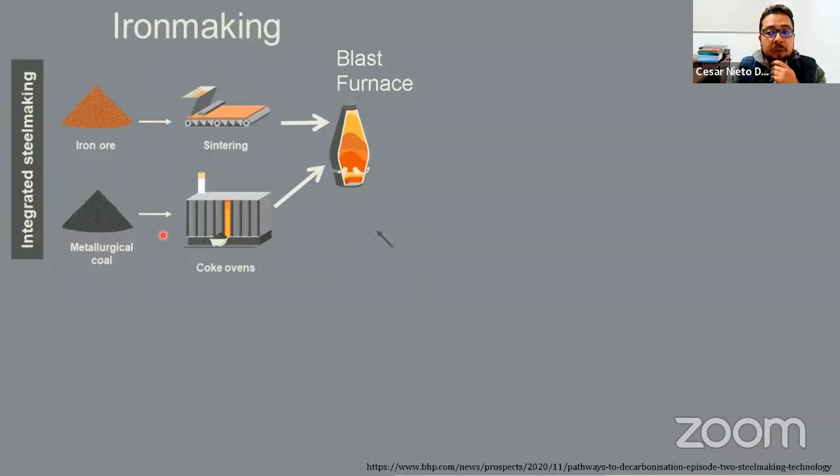Usually, it starts with an iron ore, and this mineral, which is very common, is commonly in powder form and is sintered by heating to produce small pellets. These pellets are melted in a blast furnace, and the main fuel of the blast furnace is coke. I will explain later what coke is. There are two main ways to produce iron. This is the more common one when you are starting from mineral ore. But if you are starting from iron scrap, which is very common too, the furnace that you use is a cupola furnace.

Essentially, the blast furnace and cupola furnace are very similar. Both are a vertical shaft, like a vertical furnace. In the bottom of the furnace, there are some pipes that inject air or oxygen to make the combustion of the coke or any other fuel. And this heat just heats all the components inside this shaft. And that is the way in which the iron gets melted, and you produce some other things.

The main difference between the blast furnace and the cupola furnace is that a blast furnace is a semi-batch production line, and a cupola furnace is a continuous production line. Also, when you are making iron from a blast furnace, most commonly, if you only are making iron, you are going to get pig iron, which is an iron that has a very high carbon, between 3 and 4, a very high silicon, between 1 and 2, and also very high sulfur and phosphorus. It's like a raw iron, right?

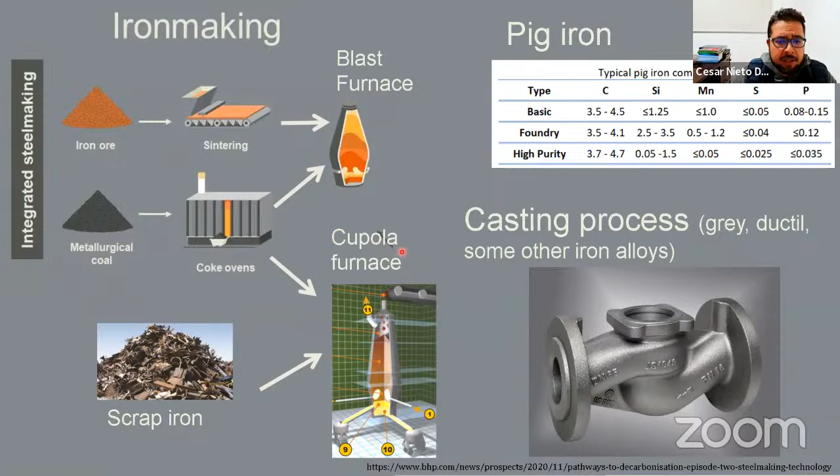And well, if you produce iron, you can follow some other steps, right? You take the pig iron from the blast furnace, and then you start to produce steel by using some other components, some other furnace like a basic oxygen furnace or electric arc furnace, and then you make some casting products, or you make some finished products like iron or steel rolls for construction or some other things.

But anyway, now here in this slide, I am showing you just the numbers about the quantity of iron that is produced worldwide. And here you can see the steel production in tons per year. Around the world, the biggest producer of iron is China, with around 1 billion tons per year of steel, followed by Europe, the rest of Asia. Japan produces a lot of iron too. Mexico also produces some iron together with Canada, and you see it's a very demanded product.

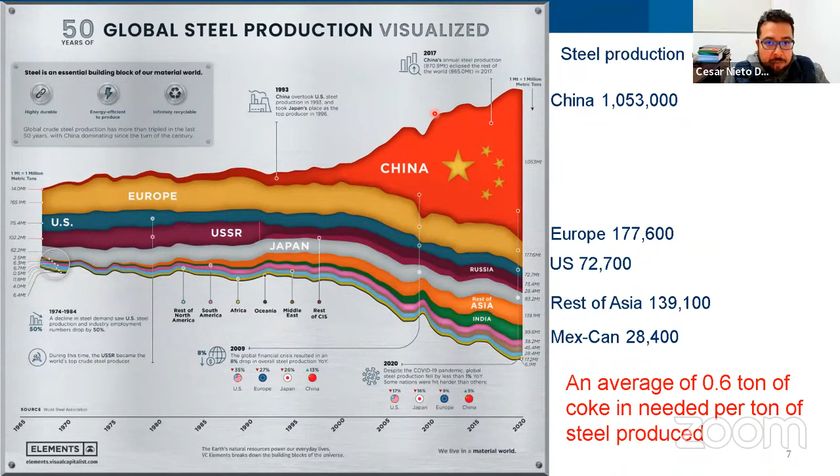Now, on average, to produce 1 ton of steel, it depends on the processing, it depends on the production line, but you need around 0.6 tons of coke. 600 kilograms of coke is needed to produce 1 ton of steel. Now, steel is like a final product, like a refined product. But remember, before making steel, you can produce iron or iron alloys.

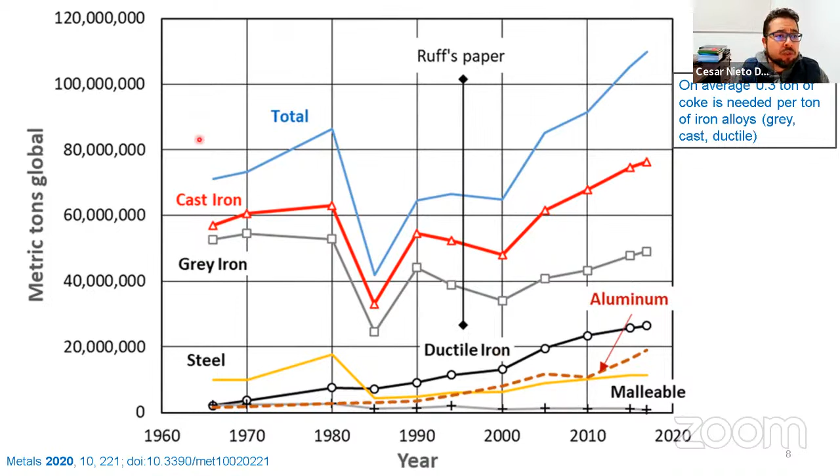In this plot, I am including the global production in metric tons of different iron and steel products. And you can see in this yellow line that the world production of steel is very low in comparison with some other alloys, like gray iron, like cast iron, like ductile iron. In total, the production of iron together with steel is around 110 million tons per year around the world.

Obviously, this changed with the years, and here is the number that on average you need to produce 1 ton of iron. You need around 300 kilos of coke, of fuel, to produce 1 ton of some iron alloys. Now, just making the numbers, and this is a very rough number, it's not very well calculated, it should give all of you an idea of how many tons of coke are needed for iron and steel production around the world. And this is around 40 million metric tons per year.

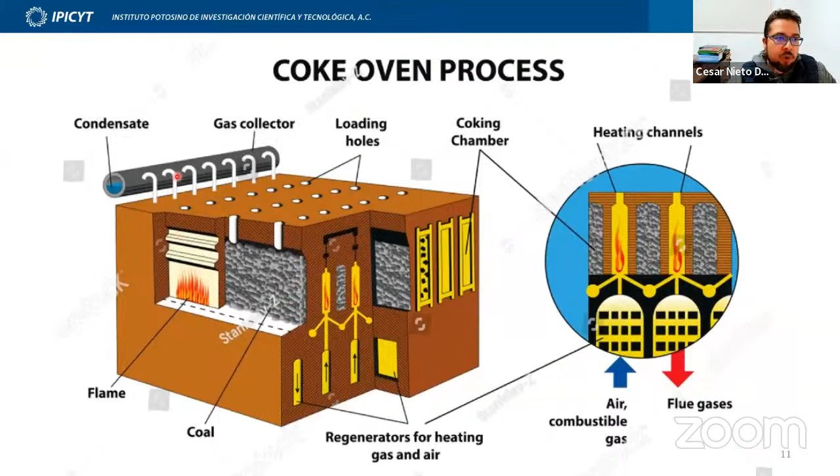Another important feature of the coke oven: here are the loading holes where the carbon is loaded, and here are the flames of the heating source. You have to collect all the gases to avoid environmental pollution.

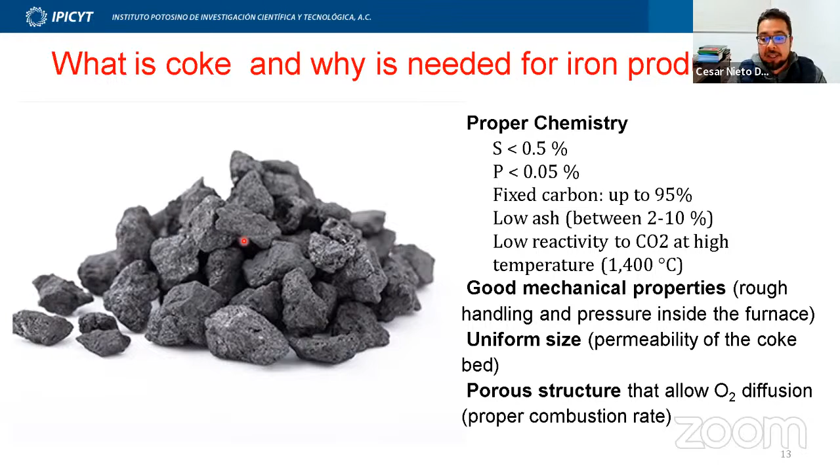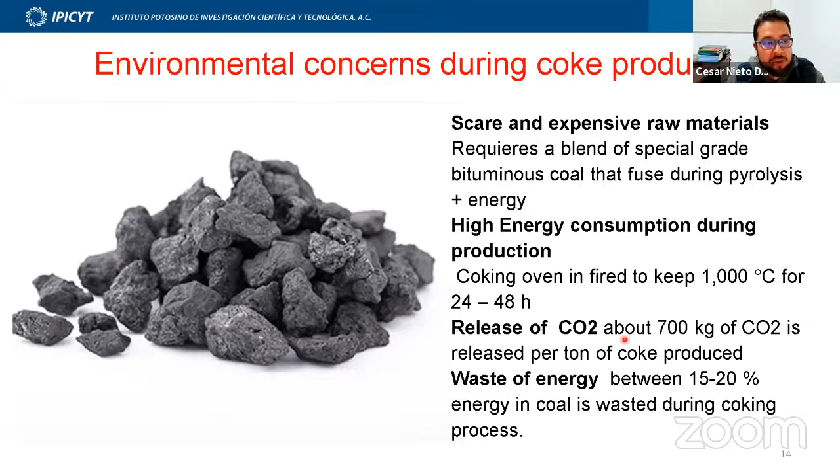Also, it releases a lot of CO2, and this CO2 comes from fossil fuel. Here is just a rough number: around 700 kilograms of CO2 is released per ton of coke produced, which is a very, very large amount of CO2. And also, there is a lot of wasted energy. The bituminous carbon used as raw material to produce coke is essentially pyrolyzed during production, and about between 15 and 20% of the energy that bituminous carbon has is just wasted.

Well, anyway, there are some other drawbacks. And just facing these environmental problems, and looking for alternatives, there has been some research done.

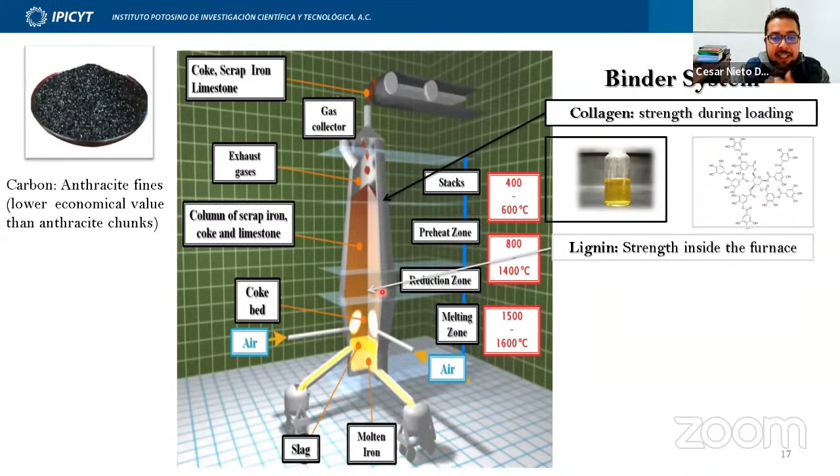We decided to use collagen as the first binder, to provide strength to the briquette before it's loaded into the furnace. The second binder we used was lignin, which provides strength in the preheat zone, or mid-temperature zone. Then we add to the formulation silicon metal, silicon with an oxidation state of 0.

Under the conditions inside the furnace, silicon carbide nanowires are formed, and these silicon carbide nanowires connect all the carbon fraction in the anthracite briquette, allowing the carbon briquette to survive all the way down to the furnace.

A little bit more detail about the binders: collagen is the binder that provides the green strength. Here is a picture of the chemical formulation of collagen. Collagen is a protein that is very common in the food industry. Here are the three main amino acids that form this protein.

We selected collagen because it's a commodity that is very common in the food industry. It is made in very high tons per year. The way in which the collagen provides binding strength to the carbon fines is by a hydrolysis reaction. Water molecules, when you dissolve collagen, interact with these carbon chains. And then when you dry the collagen, these amino acids, these carbon chains, make hydrogen bridges between all the components of the briquettes and make it hard.

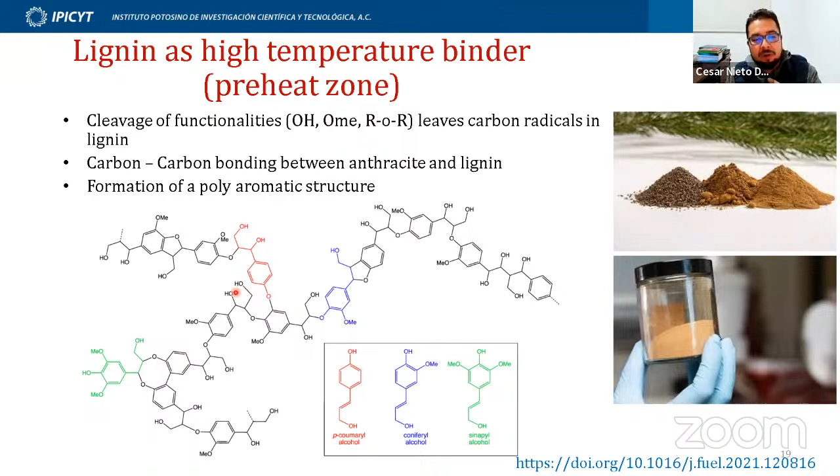Now, about the lignin. Lignin is what I spent most of the time working with when I was at Penn State. Essentially what we demonstrated in this paper, recently published in 2021 in Fuel journal, is that at mid temperatures between 600 and 900 °C under pyrolysis conditions, the lignin becomes a polyaromatic carbon. And this polyaromatic carbon binds together all the anthracite fractions at these temperatures.

But anyway, now I am going to show you a little bit about the lab scale validation that we did to prove the concept of using these three binders to bind the anthracite fines together. We made a mixture of the dry components, which are the anthracite, lignin, and silicon metal, and we bound it together with collagen dissolved in water, and we used this die to produce a brick.

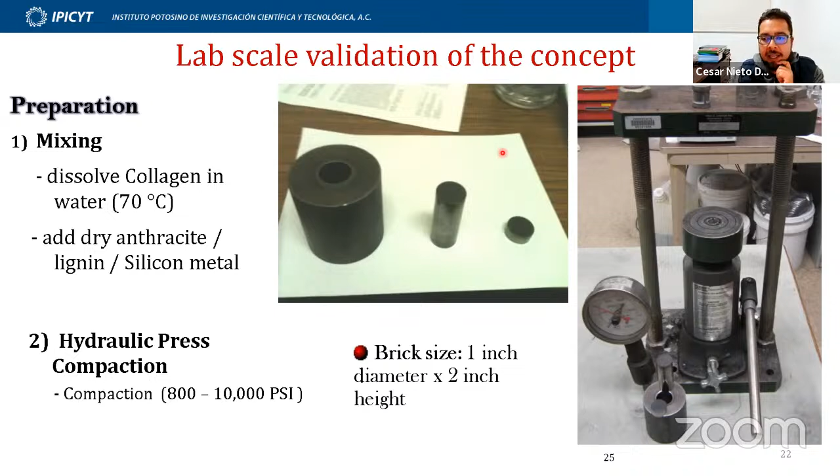We made this brick by putting the mixture inside the die, and then we applied some compaction pressure. We got this 1 inch diameter, 2 inches high, small briquette. Here is a picture of the small briquette. The main characterization that we did to validate this concept is the unconfined compressive strength, using the universal testing machine. We apply pressure with 2 plates, and we record the maximum strength of the briquette.

We did it on raw briquettes that we only made and let dry at room temperature. We also did it after pyrolysis at 900 to mimic the conditions in the preheat zone of the cupola furnace. And then we made a pyrolysis of the briquette at 1400 °C, to mimic the conditions in the reduction zone of the cupola furnace. In that way, we validated that at very high temperature, the briquette will stand together and will have very high strength.

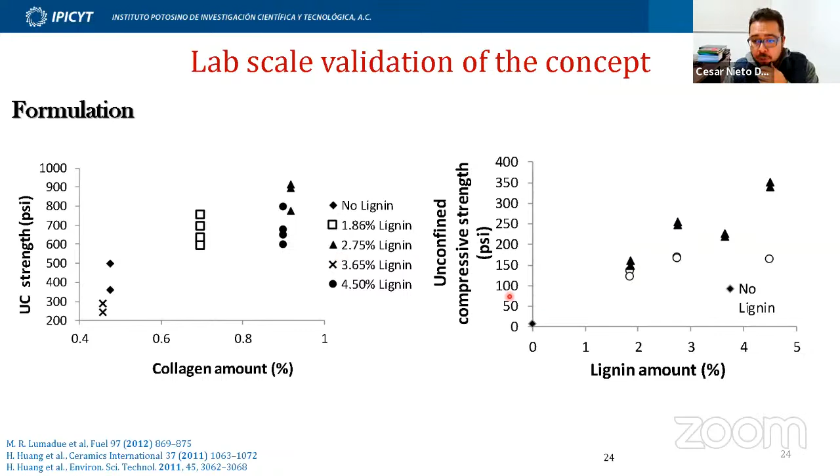First, at lab scale, we validated the concept by exploring the formulation. We saw that when we use a different amount of collagen, the UC strength of the briquette dried at room temperature increases when you increase the amount of collagen. Also, it makes an interaction with the lignin that we are using. We also explored the effect of lignin: if we increase the amount of lignin, we increase the strength of the briquette. And if we increase the amount of silicon metal in the formulation of the briquette, we increase the strength.

Just one number to put it in context: if we prepare a briquette with 5% silicon metal, we can have a briquette that can withstand 1500 kPa, which is a very, very high pressure, and it's coming from the silicon carbides. We also explored some production conditions, for instance, the particle size. If we use very small particle size, we increase the strength. And if we apply more pressure when compacting the briquette, we obtain a more dense briquette with higher strength.

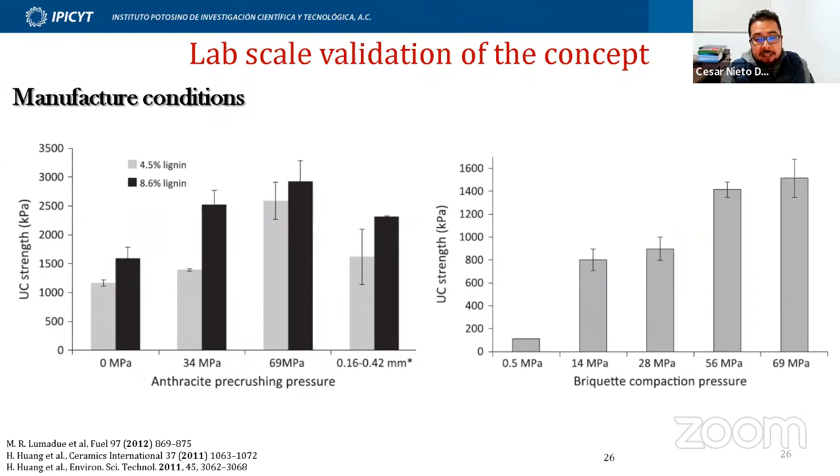Now, after the validation of the formulation, the main problem was that the people in the foundry didn't believe that this was going to withstand all the way down from the top to the bottom of a cupola furnace, because they had tried anthracite briquettes and also anthracite chunks before, and they were very reluctant.

They didn't like anthracite in the furnace. But anyway, Professor Cannon at that time was very persuasive, and he just got funding from, I think, NSF or some other companies, and they said, okay, let me try these briquettes, and if your production just gets wasted, I will pay in full. Anyway, they allowed us to try these briquettes inside a cupola furnaces. And these are the results that I am about to show you.

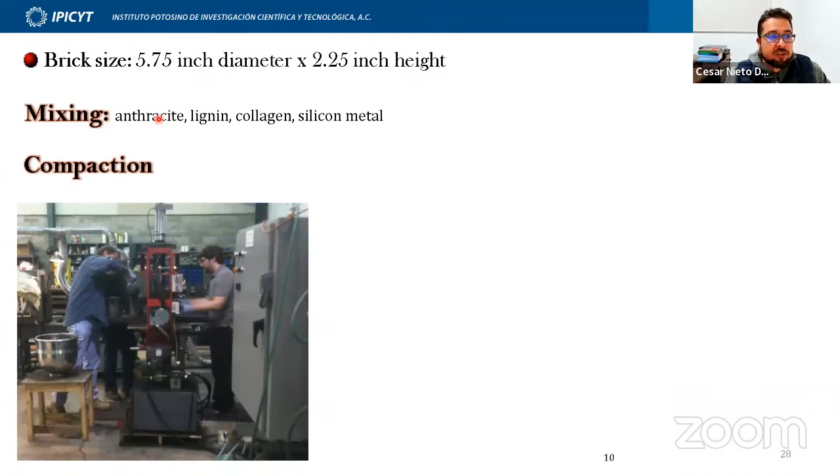Here are just some pictures. We scaled up the production from this 1 inch by 2 inches to this big full-size anthracite brick. This is about 6 by 2 inches in diameter. And the production is very easy. You just mix the anthracite, lignin, and silicon metal. You add collagen in a water solution. You make a compaction. Actually, that's Professor Fred Cannon working.

And then we have a drying conveyor, because you need to dry this very fast to increase the mechanical properties. And that way we produced around 8 tons of anthracite bricks of this size. Every single one of these briquettes was around 2 kilos. And we had enough material to make 2 full-scale demonstrations in Foundry 1 and Foundry number 2, as I am going to call them right now.

And essentially, we didn't make any major adjustment to the operation. We just used the same operation as the regular conditions the foundry people were using. We used a partial 1-to-1 replacement of the coke by the anthracite briquettes. 1 ton of coke was replaced by 1 ton of anthracite briquettes. In Foundry 1, we reached up to a 25% replacement for 3 hours. And in Foundry number 2, we did 25% replacement of coke by anthracite briquettes, and that lasted for 45 minutes.

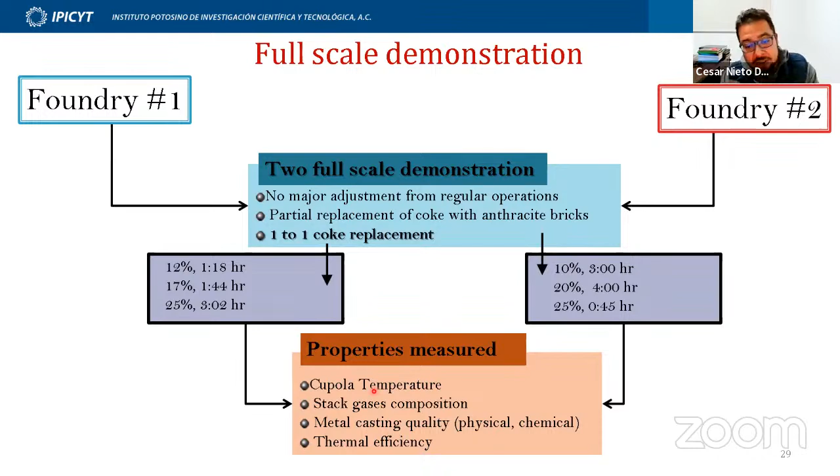And what we measured in that time, we measured a lot of things, but mainly we measured the cupola furnace temperature, which is one of the main concerns when you put anthracite in a cupola furnace. We measured stack gas composition, metal casting quality, and also thermal efficiency. Now, most of this information that I am about to show you is in this paper.

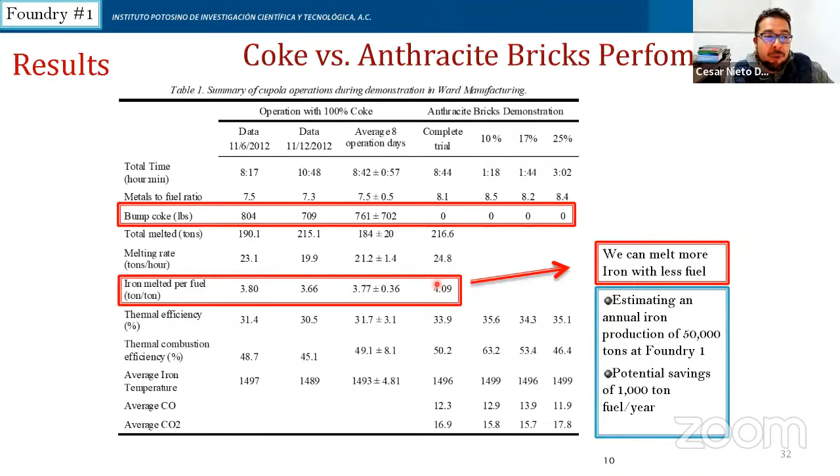Also, the iron melted per fuel was very high when we were using anthracite bricks, which means that we can melt more iron with less fuel. And just to run the numbers, for the production of this foundry number one, the potential savings are around 1,000 tons of fuel per year.

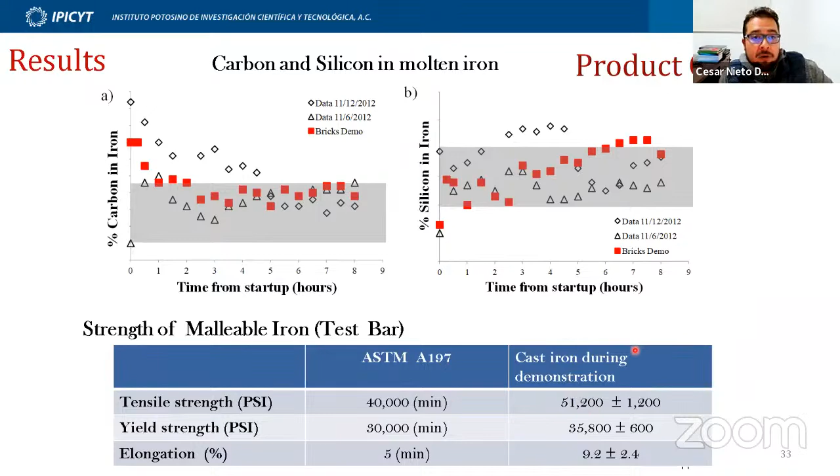Here is just some data about the metal quality. The carbon and the silicon in the iron are shaded in this gray rectangle, and you can see that the red squares, which are the data from the anthracite briquettes demonstration, are very similar to the days when they were using 100% coke. Also, the strength of the iron that was made those days was within the specification according to the producers.

You can see that the thermal efficiency is higher when you were using anthracite bricks, which means that the energy is transferred more efficiently when you are burning anthracite bricks instead of coke. And also the thermal combustion efficiency was significantly higher.

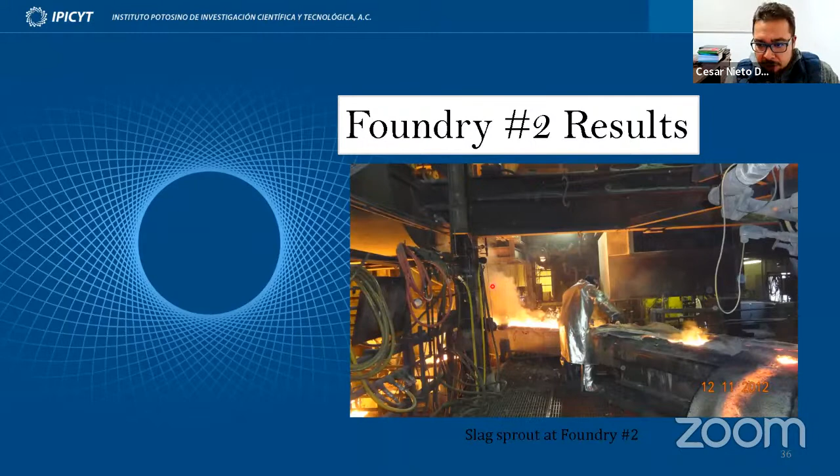And when we started the replacement of the coke with anthracite briquettes, the temperature just went down. We went from 1580 to 1520, which is a lot in foundry. We were very, very sad, and we saw that the temperature was down, and we were like, what happened with this cupola furnace? Why did it work perfectly in the other one, and in this one, which is a different cupola furnace, it didn't work? But anyway, we collected data, and when we analyzed the data, we got the answer.

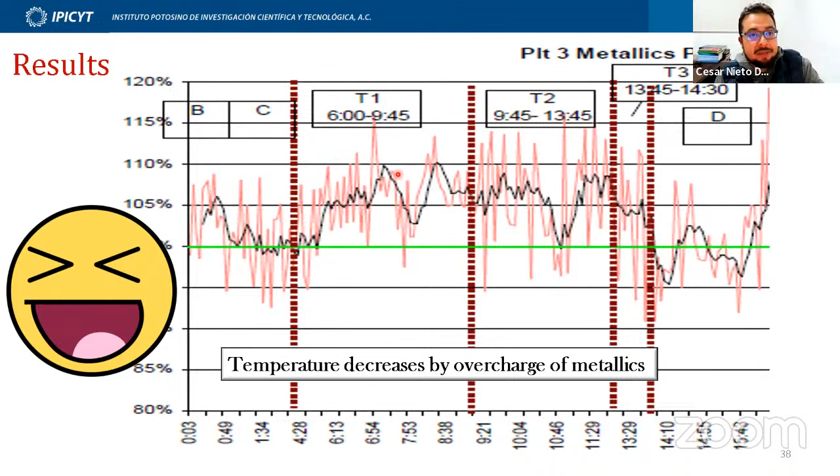But when we started to add the anthracite briquettes, there were some mistakes when they were charging metallics, and they were charging more. And this is why the temperature went down. And that makes us very happy, because it wasn't our problem, it wasn't the briquettes, it was because they were charging more metallics.

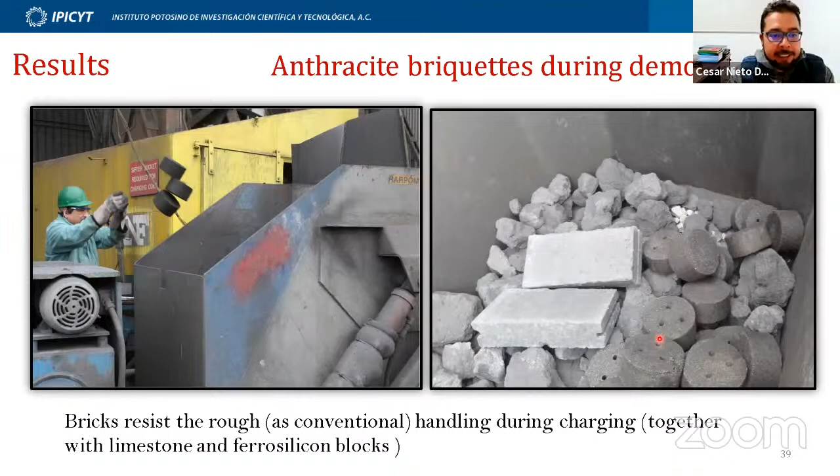Here is a picture of the loading charge car. This is a car that goes all the way to the top of the furnace. And this is just some personnel of the company that were charging these anthracite briquettes. And you can see here is the charging load. Here is the limestone, here are some ferrosilicon blocks, and here are the anthracite briquettes. And you can see that they survive this very rough handling during loading.

Now, the other question that we had when we were in this demonstration is, do they survive all the way down the furnace? Are they really surviving to the bottom of the furnace? And to verify that, the cupola furnace has a tuyere. The tuyere is like a small window where you can see how the iron is dripping, is melting, and also you can see how the coke is making combustion.

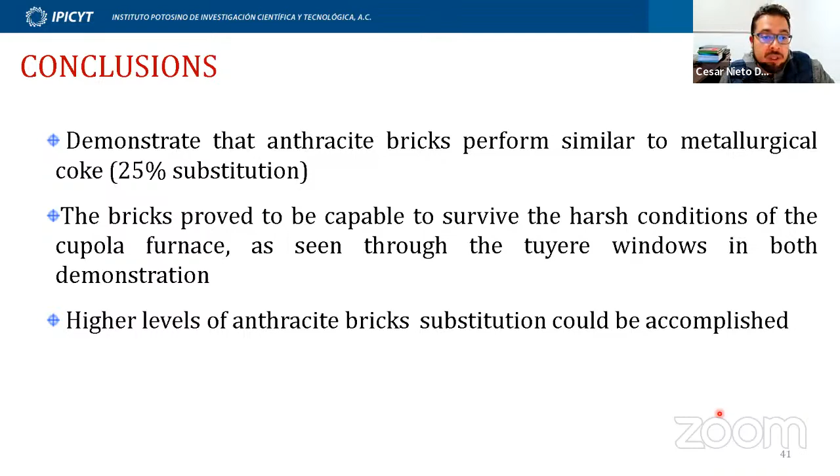Anyway, I'm about to finish. Just a conclusion about this part. We demonstrated that the anthracite briquettes perform similar to metallurgical coke, at least up to a replacement of 25% substitution. Also, the briquettes proved to be capable of surviving the harsh conditions of the cupola furnace, as seen through the tuyere window in both demonstrations. And also higher levels of anthracite briquette substitution could be accomplished. We didn't do that because we ran out of anthracite briquettes. We only made 8 tons. But it was a very successful demonstration.

Anyway, we are making materials, we are making briquettes to do the validation of the raw materials for a company that is about to produce these briquettes for production, for the substitution of coke. This company in Europe produces coke, but they have seen that in the midterm, the production of coke, at least in Europe, is going to be very, very hard.

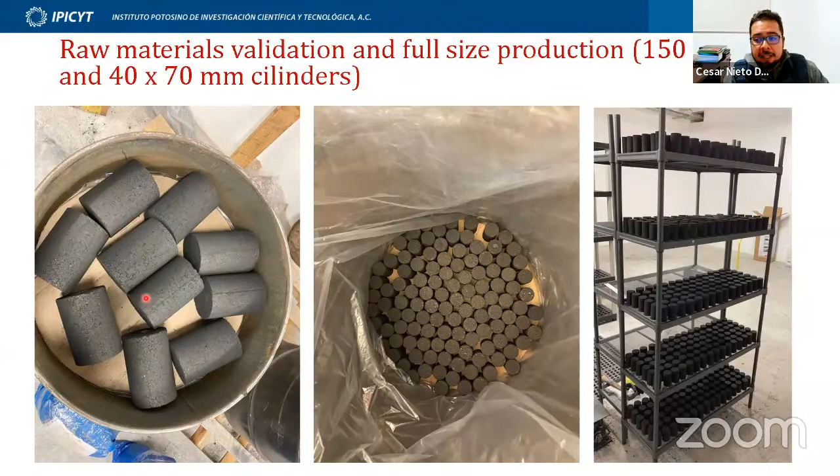The company has in mind to make like 500,000 tons of briquettes per year. And if the drying takes 1-2 days, it is just going to take a lot of time and money.

Also, we are trying to make a reformulation of the briquette to make it cheaper or more convenient. For instance, we explore the quality of different collagen. Also, we look for some other polymer that can react similar to lignin. And also, silicon metal is very expensive, and we are trying to find some cheaper silicon source that can be used to make the silicon carbides.

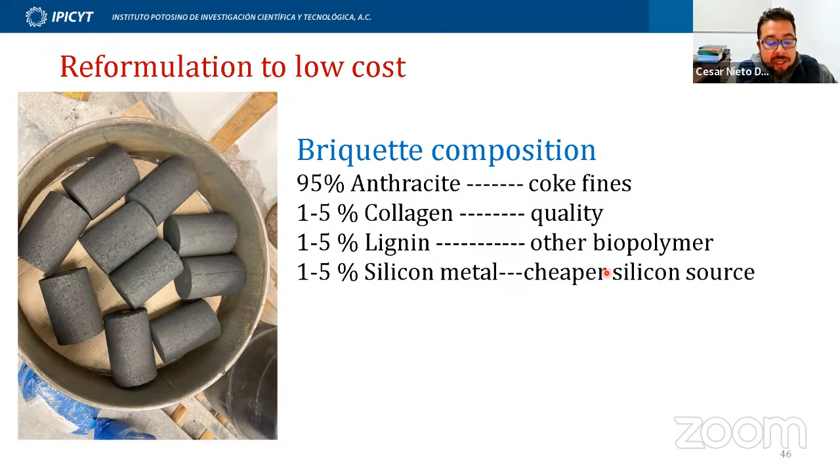Also, the other thing that we are exploring and we are going to start working on this year is, at the end of the day, the carbon source of these briquettes is still coming from fossil fuel. The anthracite is a fossil carbon, and they want to change that. Collagen is bio, lignin is bio, silicon metal we can change to bio, but the anthracite is fossil fuel. We are trying to use biochar to introduce that in the formulation and see what happens.

Always, it's a pleasure. So the title of my presentation, I named it synthetic mineral oxides and hydroxides to grow carbon nanostructures as adsorbents to capture toxic elements and compounds, considering the carbon-based materials topic that is now taking this very nice new journal, Minerals and Mineral Materials.

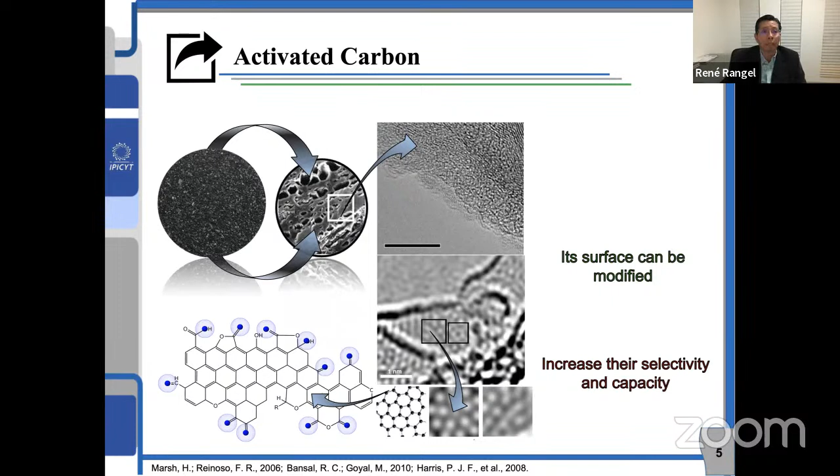These kinds of materials now are part of many materials or equipment these days. You can see that batteries now have graphene oxide. Many electronics have carbon material. So again, this area of carbon materials has been very important.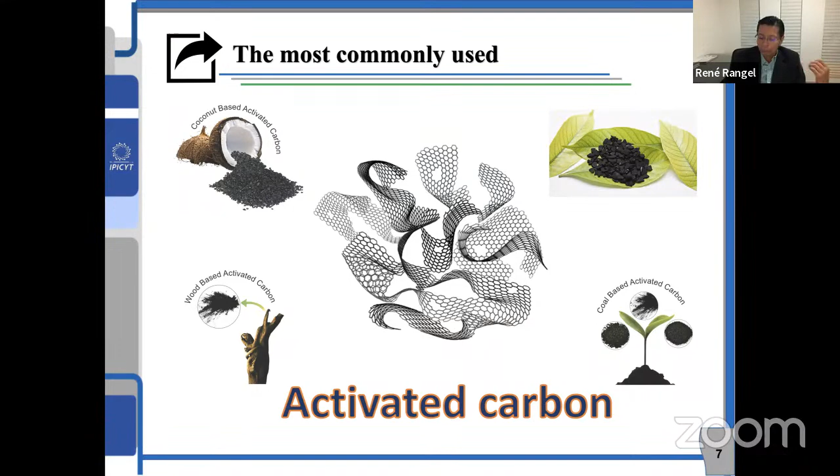In the automotive industry, use is increasing a lot. For example, in China it's used a lot as a heating material. So this, again, activated carbon in a bigger size is still used a lot these days. And as I mentioned, if we move to nanotechnology, carbon nanotubes and graphene oxides have been very important in the development of many equipments and devices.

Now I will talk a little bit about the research I'm doing with my students at IPICYT in Mexico. These are only some examples. We are using carbon materials combined with metal oxides and hydroxides as adsorbent materials to remove metals, to remove hydrocarbons, now working in CO2 capture, and also in the removal of volatile organic compounds. We have also used these materials as redox mediators, combined with biological processes.

Also, we are studying electroabsorption, where we combine materials with electrochemical processes, in collaboration with my colleague Dr. Luis Felipe, who we'll talk about later. We have also studied the interaction of carbon nanomaterials like graphene oxide with different bacteria, which is very important. We are producing different carbon materials for solar cells, like carbon quantum dots, these days from waste, for example. We have also used carbon materials as anti-corrosive coatings to protect valuable metals like gold and silver. So these are examples of the research I'm conducting with my students at IPICYT, and today I will give just a few examples.

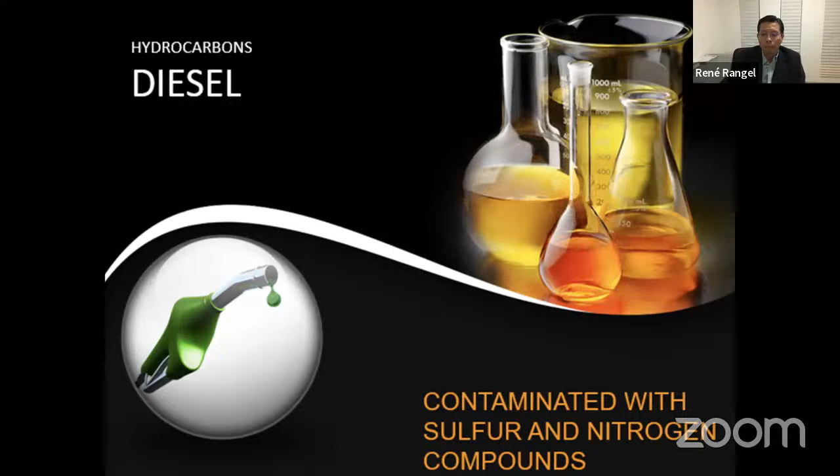The first topic I would like to take is hydrocarbon decontamination. In this case, I will concentrate just a little bit, because we don't have too much time, on diesel contaminated with sulfur and nitrogen compounds.

What's the problem with diesel? During combustion, diesel will produce particulate matter, as well as different gases like NOx and SOx that are very contaminating and pollute the environment. Some of these contaminants will produce acid rain. So we want to use diesel, but as pure as possible.

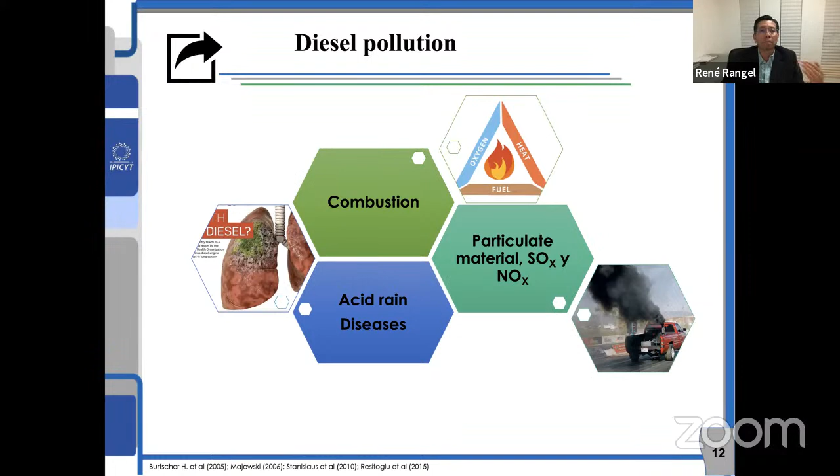The composition of diesel is quite complex. We know that it's made of paraffin, also monoaromatic hydrocarbons, diaromatic hydrocarbons, and of course it has sulfur and nitrogen compounds, which is the main problem.

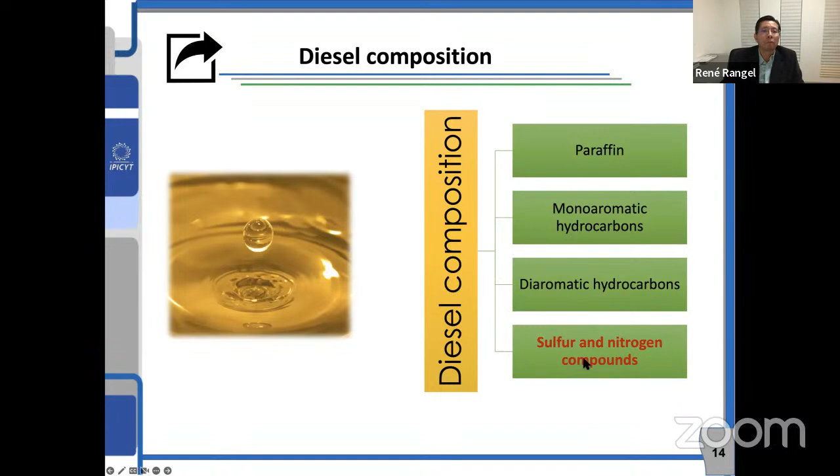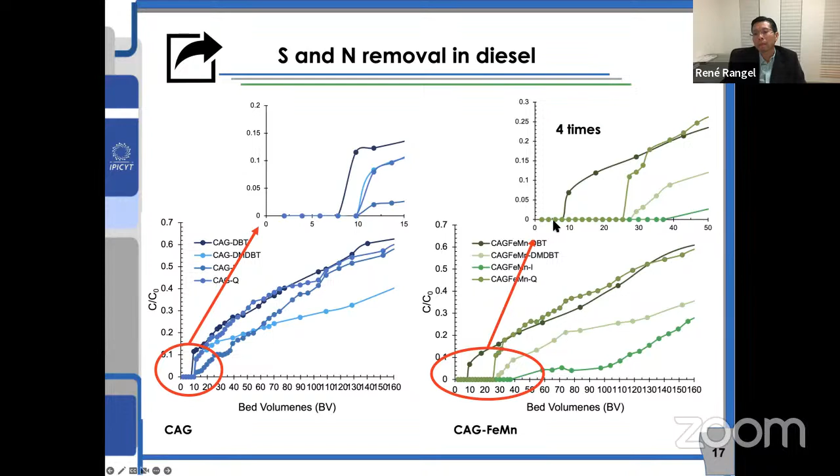In this case, the initial breakthrough was shifted to close to 40 bed volumes, so 4 times more sorption capacity, just by including metal oxides like iron.

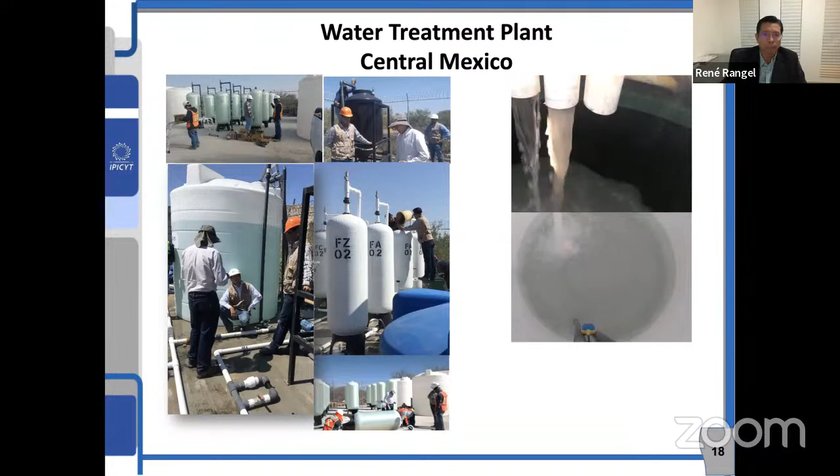So that's important. And this technology, we have even applied at big scale to decontaminate water with hydrocarbons like diesel. We have installed 5 water treatment plants, mainly at international airports, plants that treat 200,000 liters per day.

All these water treatment plants are based on adsorption. These big columns you can fill with modified materials, and these plants are very efficient. We have to work at lab scale, but I always push my students to think in the real application. Let's go and apply it. So it's not easy, but it's possible.

This is one example. I even involve my students in the installation of these plants to get the feeling of how we can solve a real problem. So this is an example about removal of hydrocarbons, and purification of diesel in this case. Now I will shift to the arsenic problem.

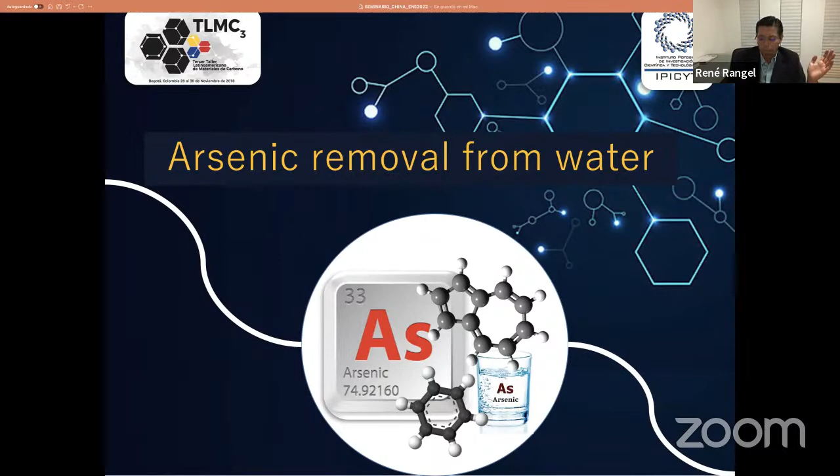We know that we have many kinds of contaminants in water: ions, dyes, pharmaceuticals, microorganisms, hydrocarbons, solvents. All these kinds of contaminants are increasing day by day in the water. And one of the major contaminants we know is arsenic.

Arsenic is present in many countries around the world. Of course we have it in Mexico, and definitely there are problems in China. Nobody wants arsenic - it's a poison, it produces many types of cancer. Thousands of people are still dying per year around the world.

The regulations now establish that we should have no more than 10 parts per billion in drinking water. To reduce the huge concentrations we have in some water sources, which can even reach parts per million, down to 10 parts per billion, is quite a challenge. So we need very good materials with good performance to reach those very low values.

Well, what have we done to face this problem? Some years ago we said, let's synthesize metal oxides and hydroxides as small as possible. We know that if we reduce the particle size, we increase the exposed surface area. A bigger surface area means we expect higher absorption capacity, for example for arsenic. We know, and it has been published many times, that iron oxide is very selective for arsenic 5.

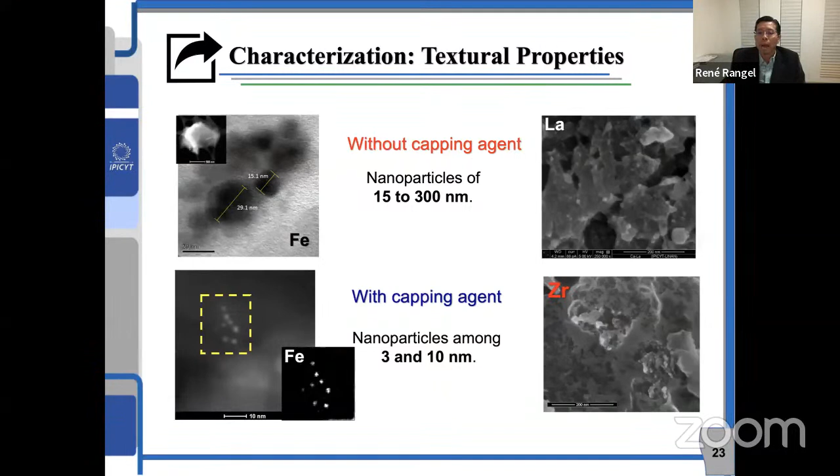So what we have done is anchor these particles on activated carbons. In this case, we managed to anchor particles - iron oxides and lanthanum particles - on activated carbon ranging from 15 to 300 nanometers. But if we use a capping agent, as I will explain in the next slide, we manage to reduce the particle size of these metal oxides quite a lot, to 3 to 10 nanometers, and the dispersion of these particles on the carbon surface is very homogeneous.

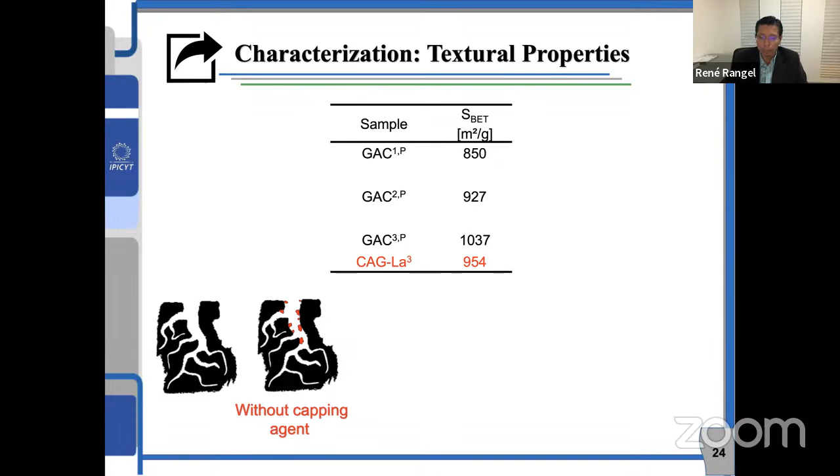One of the challenges is not to block the porosity of the activated carbon. Here, as an example, I show three materials with different surface area. Once we anchor lanthanum, the surface area decreases. But if we use a capping agent, we manage to keep the surface area - even in some cases it increases a little bit, and we get better dispersion.

In this case, the metal oxide is not just impregnated on the surface - it is actually anchored on the surface. This is very important, and this is the mechanism we have published many times. If we don't use a capping agent, the clusters of metal oxide can grow, and we end up with a quite big particle. But if we use a capping agent like phosphorus, for example, we manage to block the growth of the metal oxide.

With a simple rinse with water, we get rid of the capping agent, and we end with very small particles. That's very important for the application. In that case, the arsenic will remain on the material, and the metal oxide will not leach to the treated water. That's very important.

In this case, the metal oxide will anchor on the oxygen-containing groups of the carbon material. So we can anchor different metal oxides. In this case, you can see them in red dots.

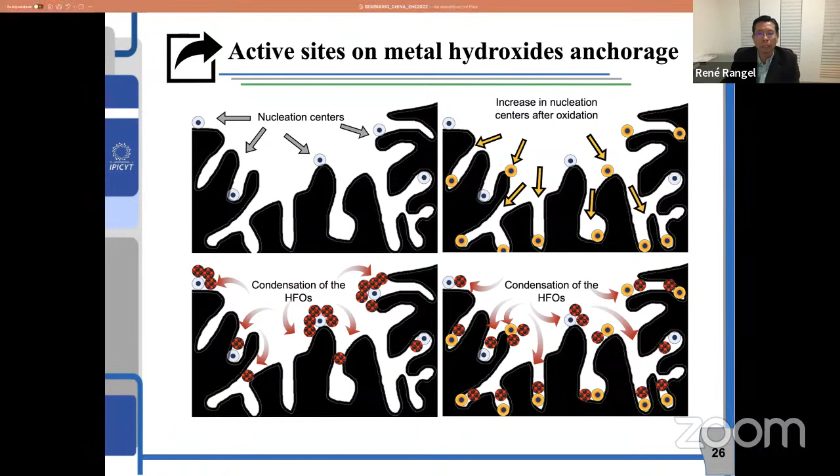One of our ideas was to increase the concentration of metal oxide, aiming for a higher sorption capacity of arsenic. So we said, what if we oxidize the material? We will increase the amount of nucleation centers, in other words increase the concentration of oxygen-containing groups, giving us a higher concentration of metal oxides, and with that, a higher sorption capacity. That was the idea, the thesis of one of my students.

Shown here schematically: if we have a material with a lot of metal oxide but also negative charge, we will have repulsion of arsenic 5. But if we have a positive charge along with metal oxides, the absorption capacity will increase. So the message here is we need a balance, and this is very important.

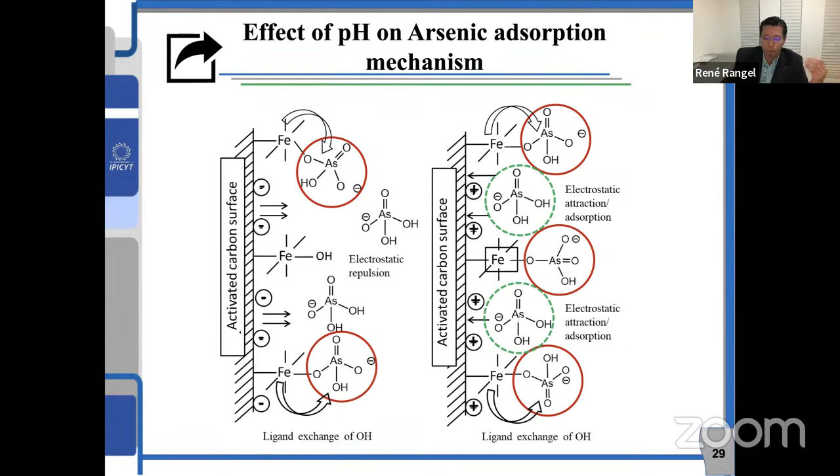That's what we learned from arsenic removal. Apart from using metal oxides like iron and lanthanum, in the last year we have anchored mixes of metal oxides like combinations of iron and manganese, iron and cerium, zirconium and cerium, and obtained a very good material. We just published the results—a material with a very high capacity of more than 180 milligrams per gram, which is quite a lot—and we applied for the patent, so we are very happy about that.

Another advantage of using mixes of metal oxides is that they are more stable, so they will not leach as easily. We also get very amorphous materials with higher surface area, which gives us much higher removal of arsenic.

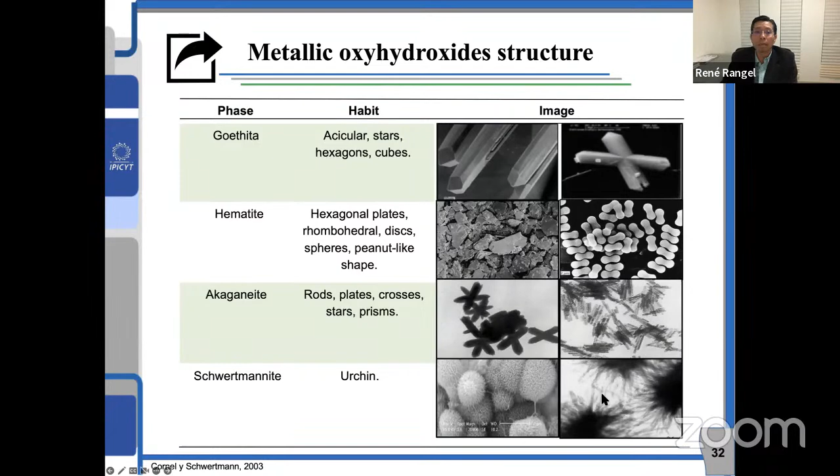Applying these mixes of metals, we have obtained different shapes of metal oxides—this kind of stars, peanut-like shapes, plates and prisms, and also urchin. Recently, when we mix iron with manganese, we obtain interconnected fibrils with also very high absorption capacity. These materials are quite small and very amorphous, giving very high surface area and interesting absorption capacity.

We have published these results as well.

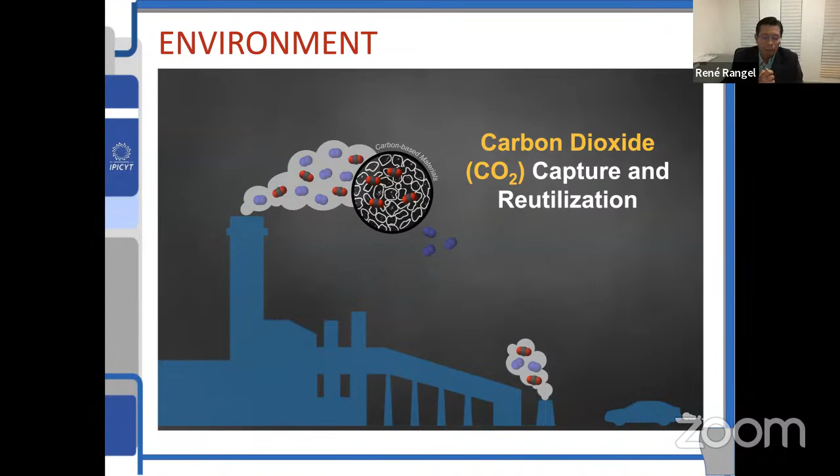Now I want to move to the carbon dioxide topic, which is very interesting these days. We know that environmental pollution is important, and we know that the concentration of greenhouse gases is increasing a lot. Of course, this has changed the climate, and this is leading to global warming.

We also know that carbon dioxide contributes 66% of this effect, so it's very important to target this contaminant. Of course, around the world, governments have many agreements to reduce CO2 contamination as much as possible.

What is the reason? We know this causes global warming, but if we look at the concentration of this contaminant, going back to 1750, the concentration in air was 278 parts per million. The report from 2021 showed 416—that increased a lot. But if we continue like that, by 2050 the concentration of CO2 will be 550. This will change everything, and it's already changing everything—everywhere, in Mexico, in China, everywhere, the weather has changed a lot.

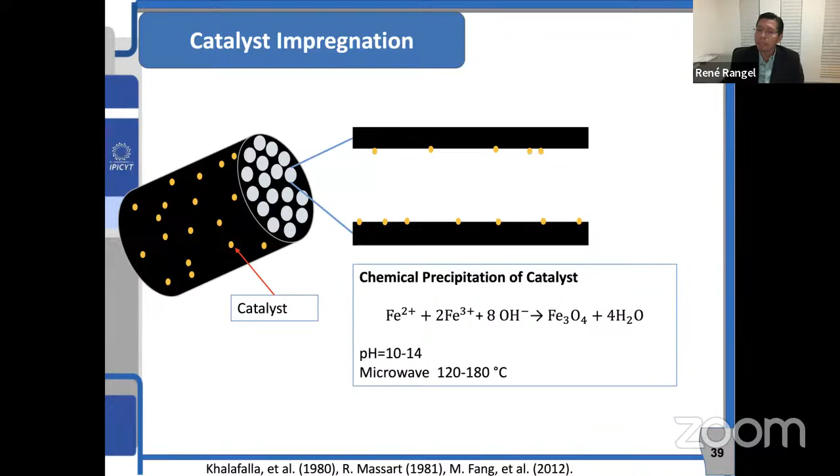Once we have the catalyst, we apply a chemical vapor deposition. This is the basic methodology. And in this case, we are using acetylene as a carbon source, okay? And we synthesize these nanostructures in just a few minutes; in 2 to 10 minutes the material is ready. Of course, we need to control the concentration and the temperature. As you see, we are using between 500 and 800 to finally grow these carbon nanostructures as homogeneously as possible.

So once we have that, we have a micrograph: after a few minutes, we synthesize these carbon nanotubes. These are already anchored, also very important, on this very nice biochar, this very nice fiber. As you can see here in the tips, the catalyst ends up on the tip, okay?

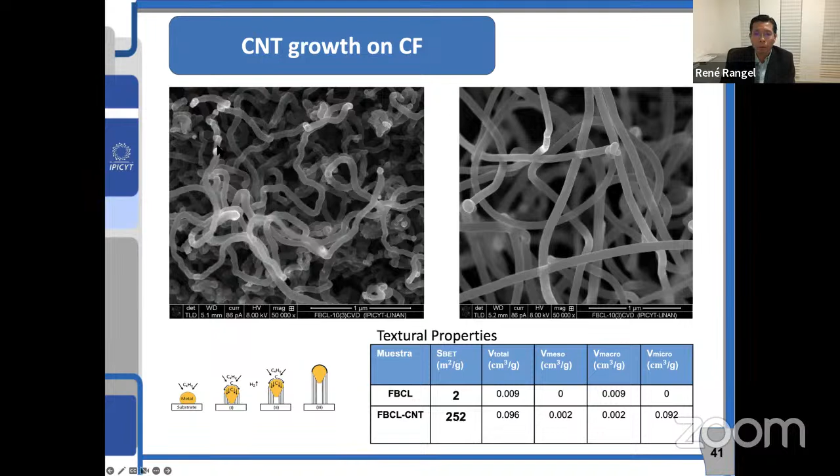And here, something very important is that the aim is to drastically increase the surface area. So as you can see here, the natural fiber, the carbonized fiber, has a very low surface, close to 2 square meters per gram. But once we grow carbon nanotubes, the surface increases up to 250 square meters per gram. This is very important because all this area is already exposed to adsorb CO2, okay?

Some materials, of course, can have very high surface area, but these materials are microporous or mesoporous, so we will have some diffusional problems. In this case, no, because these carbon nanotubes are inside these big pores of the fiber, so kinetics are very fast.

Okay, here are some results. This is at atmospheric pressure and 25 Celsius degrees. If we compare the black line with the blue line, the blue line is the material that has the carbon nanotubes. We already increased the adsorption capacity from about 1.1 to 1.6 millimoles per gram, which is very good, and this is related to surface area.

Kinetics is very fast, as you can see, very fast, because some materials can take hours and hours to reach equilibrium. In this case, in a few minutes, you saturate the material.

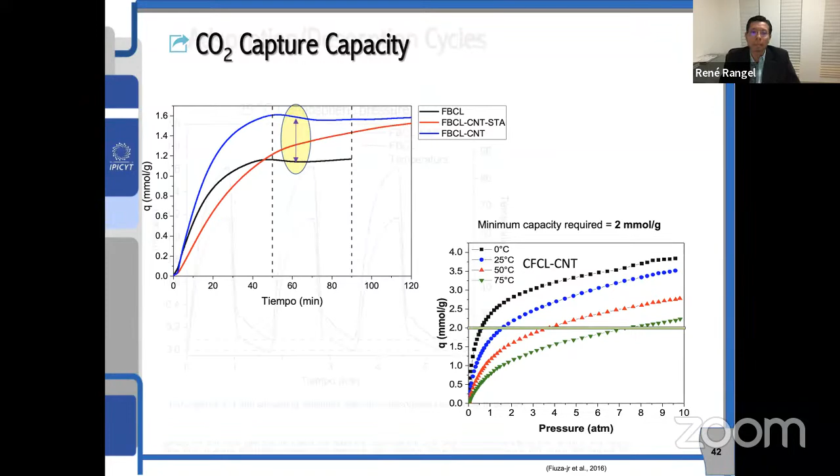Another question is, okay, is the material regenerable? Because otherwise it's not a good material. Well, in this case, at atmospheric pressure and 25 degrees, we have the cycles of adsorption and desorption. And as you can see, again, the kinetics are very fast. When it goes up, it's adsorption and then desorption. Adsorption, desorption. And so the regeneration capacity of the fibers is 99%.

And the material with carbon nanotubes is 95%. But this is at 25 degrees. If we increase the temperature a little bit, the regeneration is 100%. So this is also very good because we can reuse the material n times. That's very important.

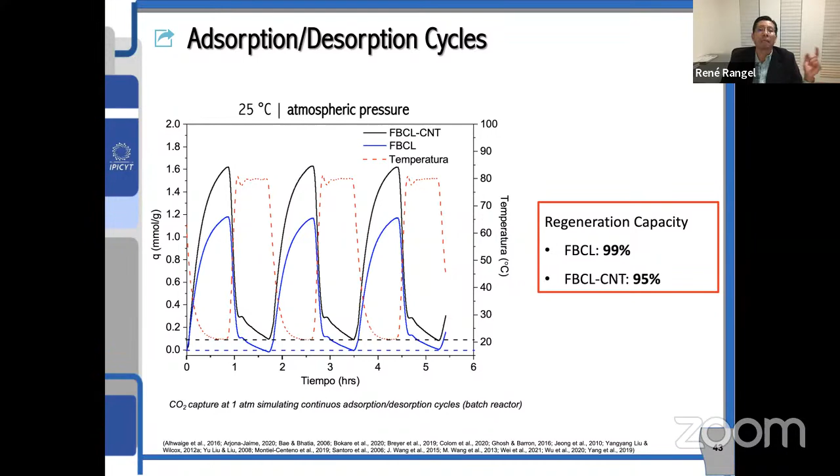Okay, now one of the questions is how CO2 can be adsorbed on carbon materials. Well, in this case, the mechanism is quite complex, but of course, as in this scheme I show you, CO2 will interact with the oxygen-containing groups, because we need to remember that CO2 has a quadrupole moment, and so it can interact by electrostatic interactions. Also remember that the graphitic layers in these kinds of materials have delocalized electrons, and so this sp2 hybridization can also interact with this molecule.

Also, we will have the edge sites on the graphene layer that are rich in electrons and negative charge, and these will also interact with the CO2 molecule. Okay, and of course, we can also have this kind of interaction between neighboring CO2 molecules, like in this case. So this is very important. This is when we have a graphitic layer.

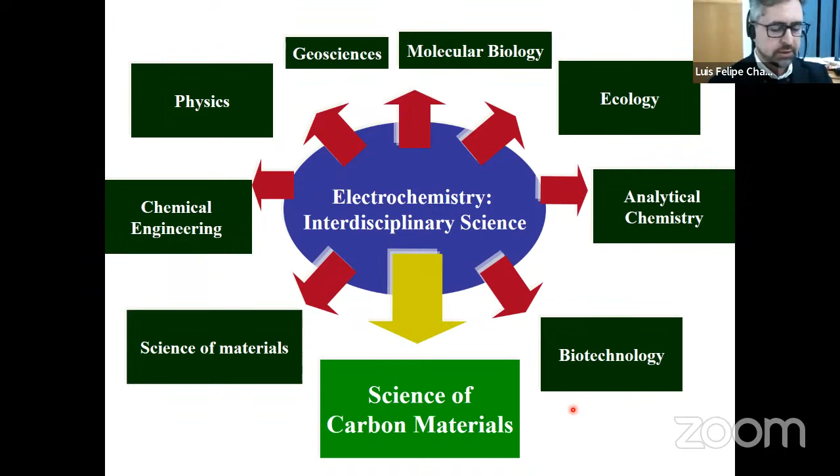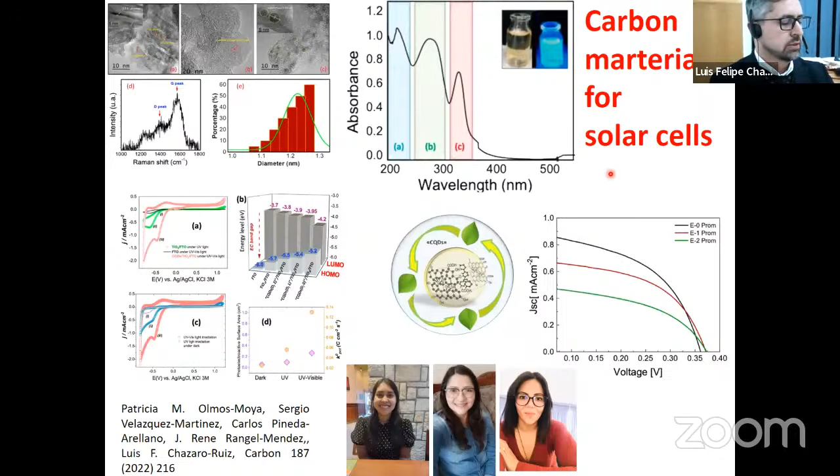Part of the things that we do are bioelectrochemical systems, and for those we use carbon materials as electrodes, especially to develop electroactive biofilms in systems like microbial electrolysis cells or microbial fuel cells. René already mentioned that we work in the development of carbon materials, especially for sensitized solar cells. Also, we have worked on electrochemical sensors with carbon materials. In this slide, you can see that we develop elements of molecular recognition that we immobilized on carbon materials like graphite or glassy carbon or carbon-based electrodes.

These other two examples were also mentioned by René, but additionally, we work with bioelectric systems in collaboration with the biotechnologists, in which we stimulate the living microorganisms with an electric field. So then we change the metabolism to produce things that are useful, like hydrogen, or for remediation of soils or water. In the case of electrosorption, we also apply this to the removal of organic compounds, like those from the pharmaceutical industry or from the textile industry.

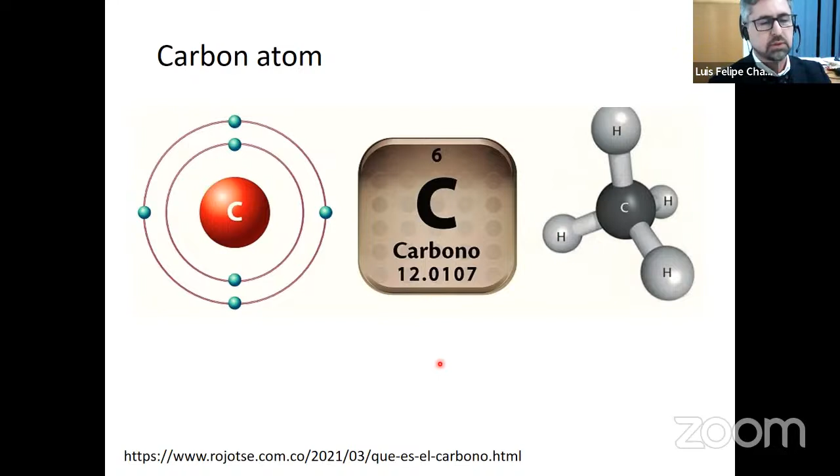And all these systems or topics have in common that we use carbon materials. As René mentioned, one of the main advantages of these materials is their electrical conductivity. But another advantage is that the morphology and the chemical properties on the surface can be modified in order to modulate the material for the application we are interested in, like supercapacitors, batteries, electrochemical sensors, photodetectors, or in the last years, conductive textiles.

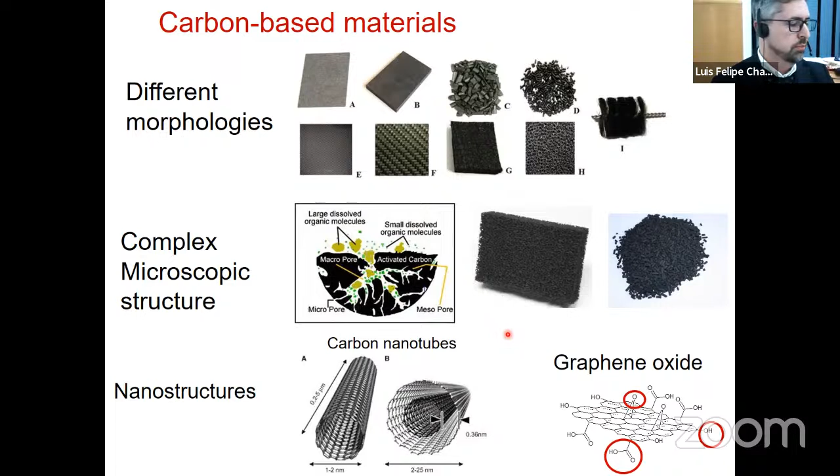So it depends on what we would like to do. Then we need to choose the morphology. So this is the important thing. But in this presentation, I'm going to focus on the importance of the correlation between the electrochemical properties and the textural and chemical properties of the carbon material. And then I'm going to start with the first example, the electroadsorption of arsenate.

And in this case, one of the important things is that in the state of San Luis Potosí, two of the main economic activities are the mining industry and the manufacturing industry. So these are the main sources of pollution in air, soil, and water. But this state is located in part of the semi-arid region of the country. It means that one of the main sources of water is groundwater.

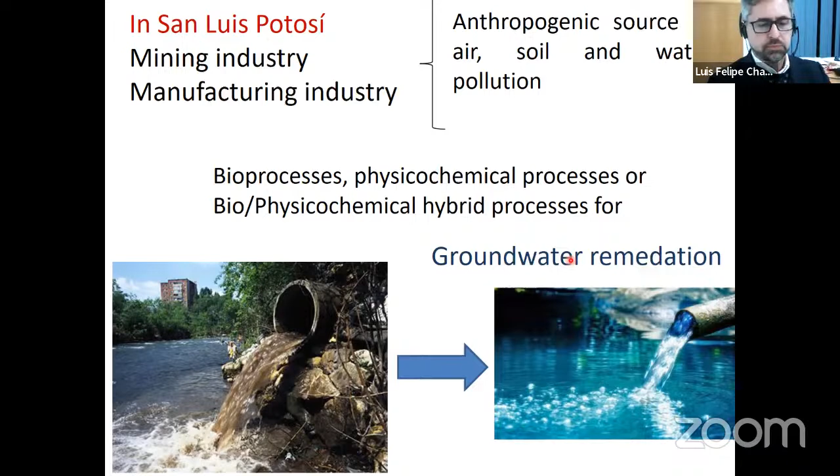And the groundwater contains arsenic, usually together with fluoride, in addition to these other elements. This couple is commonly found together, in different concentrations, but they usually are together. This is because the minerals which contain arsenic are in contact with the groundwater. And usually the concentrations are above the maximum allowable limit, which is 10 parts per billion.

So this is a very serious health problem in this state, and also in the neighboring states, especially in the north of the country, which are all located in the Chihuahuan desert, which means that people usually consume groundwater. And the problem is that this water, although it is good for human consumption, contains higher concentrations of arsenic and fluoride.

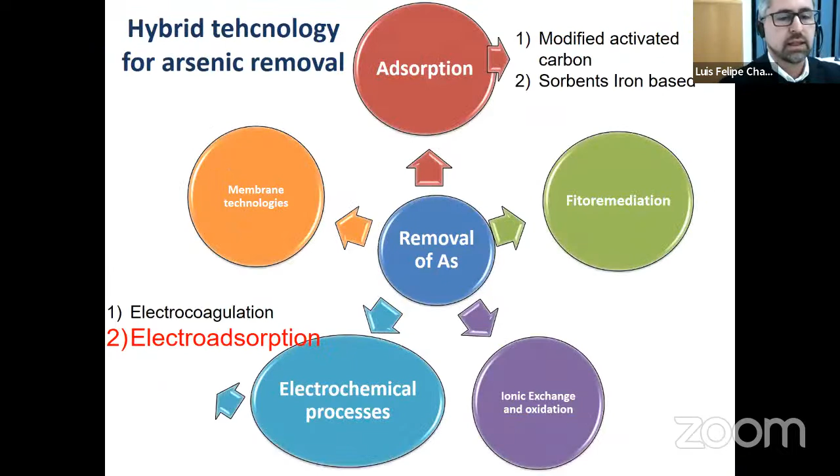And as mentioned by Professor Rangel in the previous talk, arsenic is an environmental problem. So we have been working in the study of electroadsorption, but the question is, in which part of the treatment train would adsorption be applicable? So when adsorption decreases the concentration of arsenic, like here, but the concentration is still slightly above the maximum allowable limit, the adsorption can no longer contribute to the removal. So then is the moment to apply the electroadsorption.

And the electroadsorption can remove organic and inorganic ions from the water. The electroadsorption consists in polarizing conductive adsorbents, such as activated carbon, and these materials provide high surface area to promote the migration of the ions to the electrode surface with the opposite surface charge. And the process is like the capacitive deionization process for desalination of water. This is an example.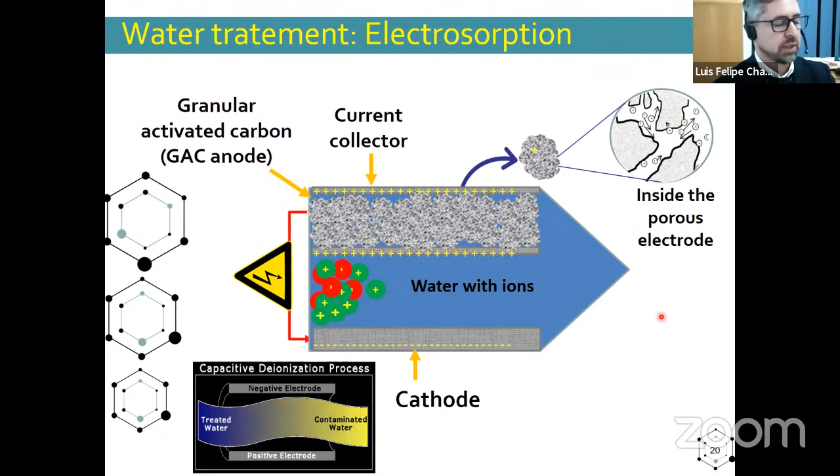Here, for example, this is an asymmetric cell where you can see the anode, and this is the cathode. This electrode is made with activated carbon, a granular activated carbon. And we can take advantage of the porous surface, as it was explained by René in the previous talk. So when you apply the potential, you can see that the ions are accumulated in the porous structure.

This example I'm going to talk about was studied by my PhD student, Rigoberto Santoyo. In this study, we use activated carbon of mineral origin, F400, which is a commercial carbon widely used in water treatment. It was used in its granular form. This was packed and used as the working electrode in an asymmetric cell with a 3-electrode arrangement. It means that we have a reference electrode to monitor what the working electrode is doing.

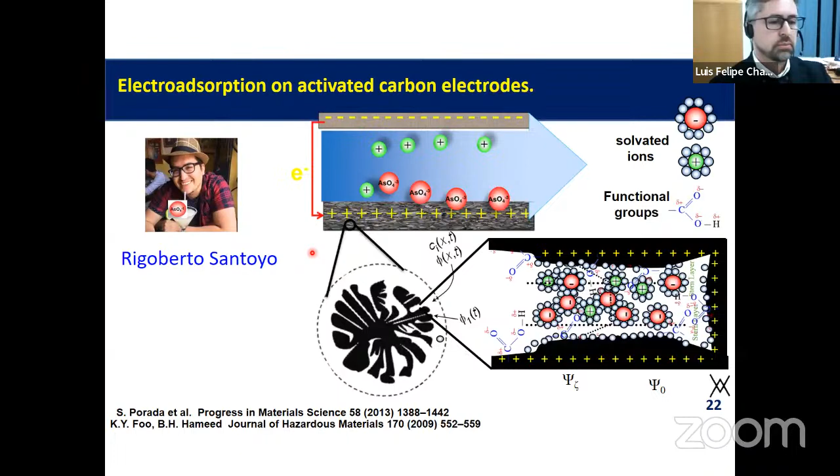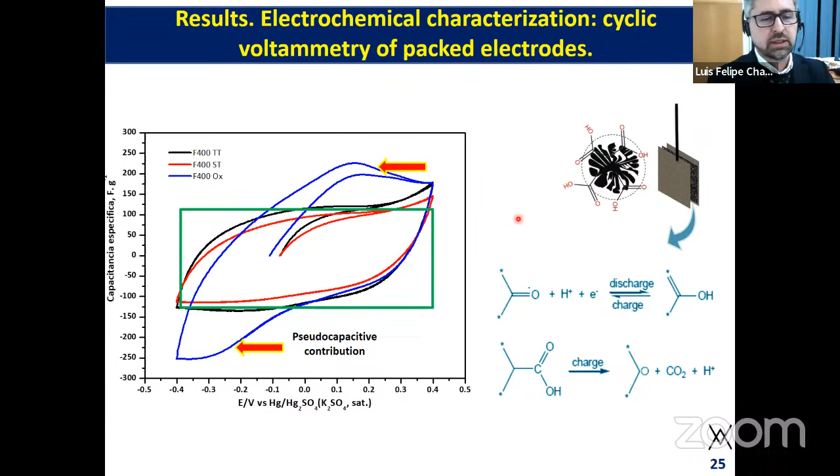And what is the origin of these secondary reactions? Because this material has a considerable amount of oxygenated groups, which are susceptible to reversible oxidation or reduction reactions, which are shown here. But these reactions are considered parasitic; they affect the performance of the electroadsorption. This is consistent with this polarization profile, the blue one. In this case, you can see that the more acidic material oxidizes at lower overpotentials than the other materials, which gives it a disadvantage for electroadsorption.

Other reactions that we have to consider are the electrolysis of water during electroadsorption, or the oxidation of the current collector, which is used for the packing of the electrode. So we have to make the list of all the possible oxidation and reduction reactions in order to avoid them during the process.

Here in this slide, when the pristine material and the material with the heat treatment were used as anodes, this is the pristine and this is the material with a more reduction degree. And the material with the highest degree of reduction increased the rate and the capacity of the arsenate adsorption compared to the pristine material.

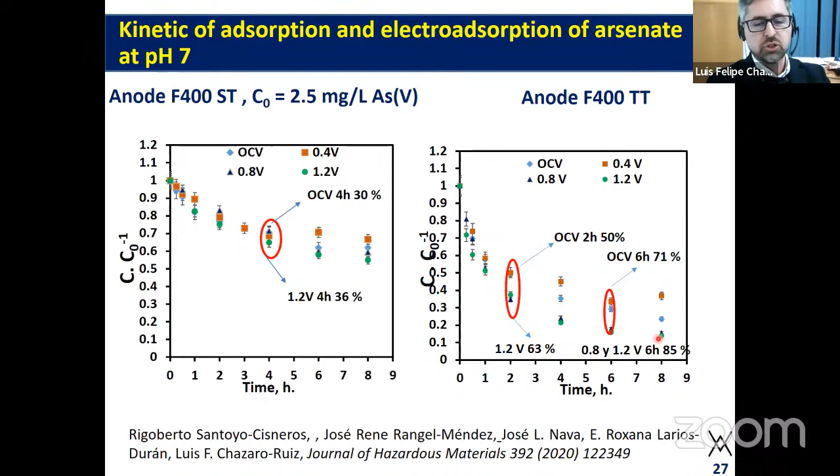So then the thermal treatment of the material provided a contribution of 70% of the adsorption process, while the potential or polarization of the electrode contributed 18.5% to the increase in the adsorption capacity. So this is an important performance aspect of the electrode. In conclusion, we can see that the higher degree of oxidation of the material, the higher the electrical resistance and the less available polarizable area, which also has an impact of a lower adsorption capacity of the arsenate, in contrast with this electrode.

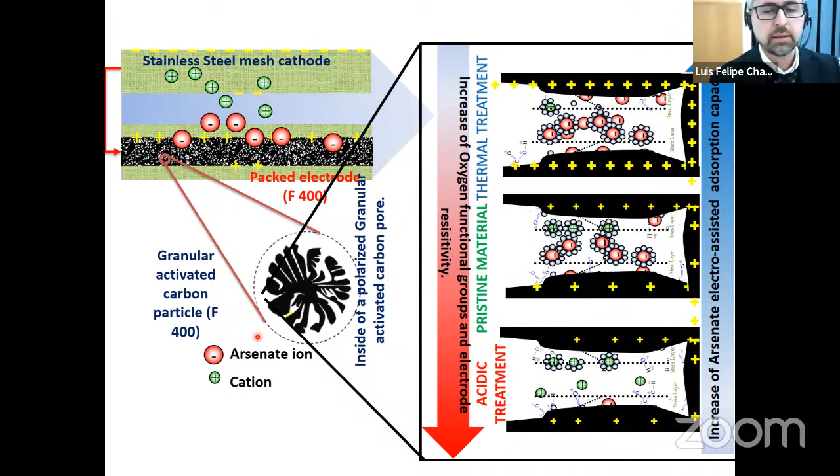So now I'm going to present the second example, focused on electroadsorption of fluoride. This study considers the textural, physicochemical, and electrochemical characterization of the electrode material and its performance with electroadsorption of fluoride.

In the case of fluoride, this is an essential element for human health, but at low doses. Its excessive and chronic consumption promotes undesired health conditions like dental weakness and skeletal deformation. So the World Health Organization established a maximum concentration limit of 1.5 parts per million, a little bit higher than in the case of arsenic.

In the case of Mexico, the concentration of fluoride in groundwater exceeds this maximum limit. As in the case of arsenic, fluoride is found naturally in groundwater because it's in contact with highly soluble fluoride-bearing minerals, such as fluorite. And as I mentioned before, groundwater is one of the main sources of water in the northern states of Mexico.

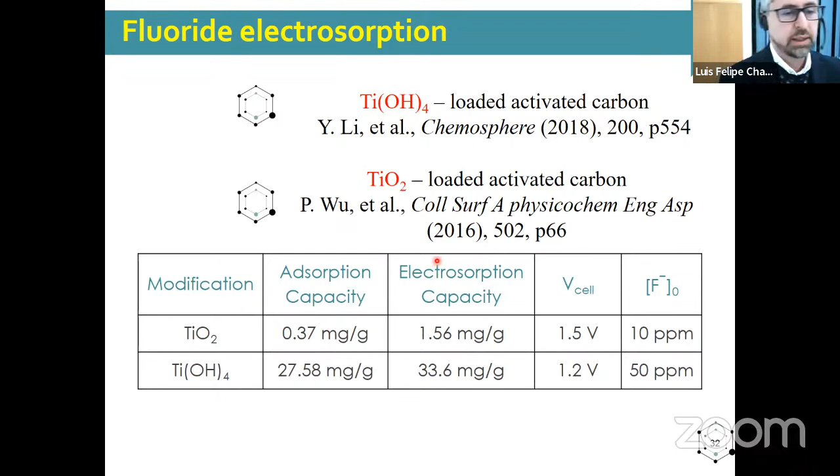So it's a chemisorption process. Even though the impregnation of lanthanum was optimized, and the adsorption performance was very good, it decreased when evaluated in tap water due to competition with other anions. There are also several reports on the capacitive properties of specific lanthanum compounds, which may favor the electroadsorption capacity of a hybrid lanthanum carbon electrode. So the hypothesis was whether the capacitive properties of the lanthanum, or the intrinsic properties of the carbon material, were much more important. So then we decided to propose three objectives for our study.

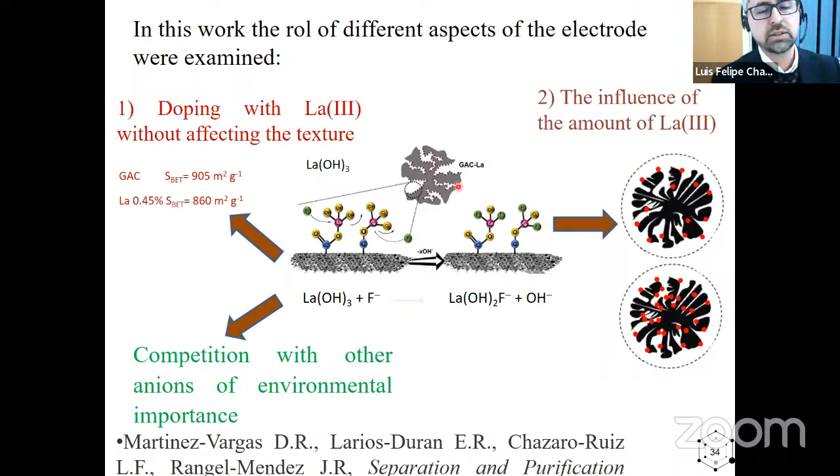The first one was to study the influence of a minimum amount of lanthanum to promote a better dispersion of this element or lanthanum clusters, and thus to avoid the occlusion of the micropores of this material. Also to study the influence of the amount of lanthanum and the changes of the textural properties, as you can see in these two figures. And also we studied the competition with other anions of environmental importance, but I'm not going to talk about this, I think I don't have enough time. So only these two aspects.

In this slide, you can see that a low amount of lanthanum doesn't significantly alter the textural properties of the material. For example, the content of 0.45% decreases only a little bit the surface area of the material. And you can appreciate that the distribution of the pores or the clusters is essentially very well preserved, as you can see here, and the pores didn't change significantly after the impregnation. So these clusters were very well dispersed. Also, another important thing is that this carbon is highly disordered with irregular pore structure.

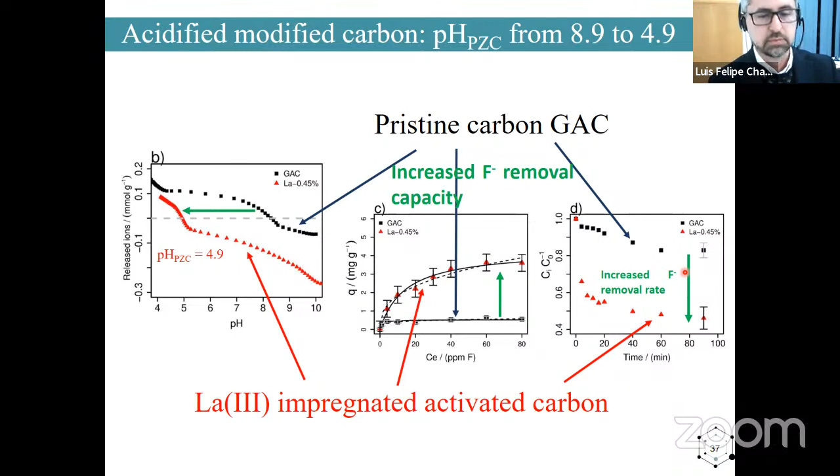So another interesting thing here is a very important electrochemical parameter for electroadsorption, called the potential of zero charge. This parameter should be correlated with the point of zero charge. And here, for example, you can see that the point of zero charge is modified, is more acidic as a function of the increasing amount of lanthanum, and for which their surface will present a negative charge at neutral solutions.

The other thing is that the pristine carbon presented the lowest potential of zero charge, and then this value of the modified carbons increases to more anodic or positive values as a function of the increasing amount of lanthanum 3, as you can see here. So the increase of this value for the modified carbons implies that they will require much higher polarization values, or much higher energy, to polarize them, which is a disadvantage for the process. And these higher polarization values are necessary to change the surface excess and also to remove fluoride.

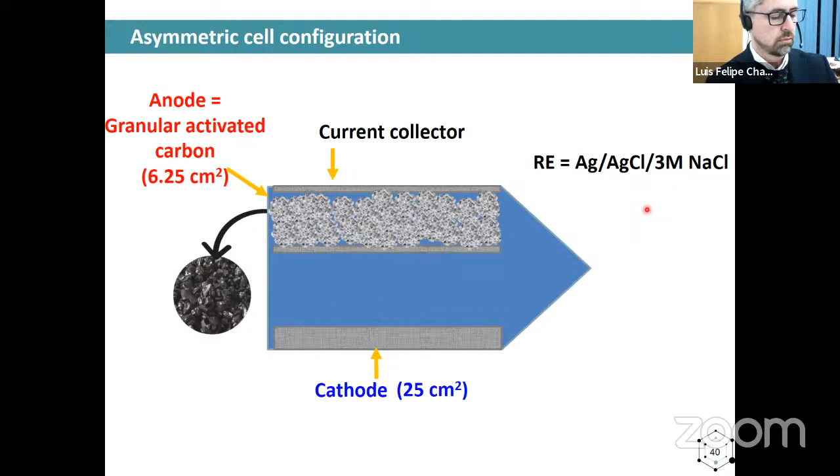In this study, you can appreciate that the electrosorption kinetics are studied by potentiostatic control of the anode under the application of a step potential. A step potential means that you wait a little bit at the beginning without electrical stimulus, until the system is in equilibrium, and then you start the polarization.

In contrast, in this other case, the polarization is applied from the beginning, meaning you don't wait for equilibrium. You start the polarization very quickly, as soon as you put the electrode in solution.

So then the first step, in this case, was at open circuit potential, meaning without electric polarization. During the application of potential, when the adsorption equilibrium was reached, a maximum time of 3 hours was maintained before increasing to the next applied potential value.

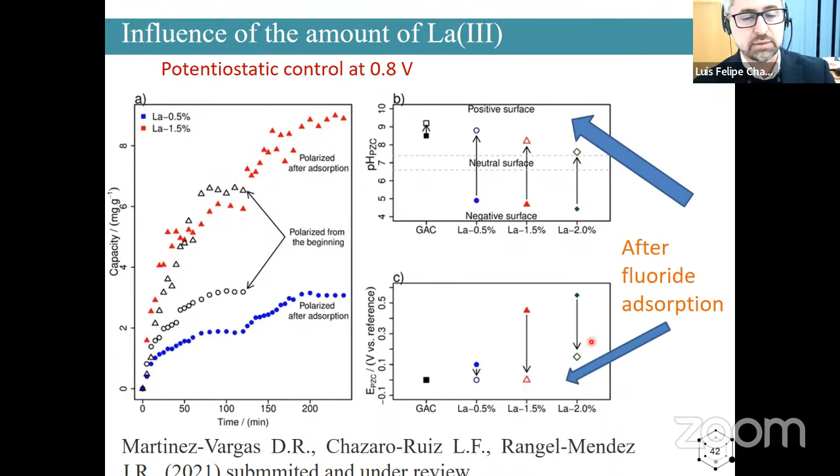So this mechanism agrees well with the Donnan amphoteric model. This model was very useful to describe these results because it says that a positive surface is better suited for anion electroadsorption due to a decrease in the energy needed to modify the surface excess. I mean, you have less co-ion expulsion, or a higher electrode charging.

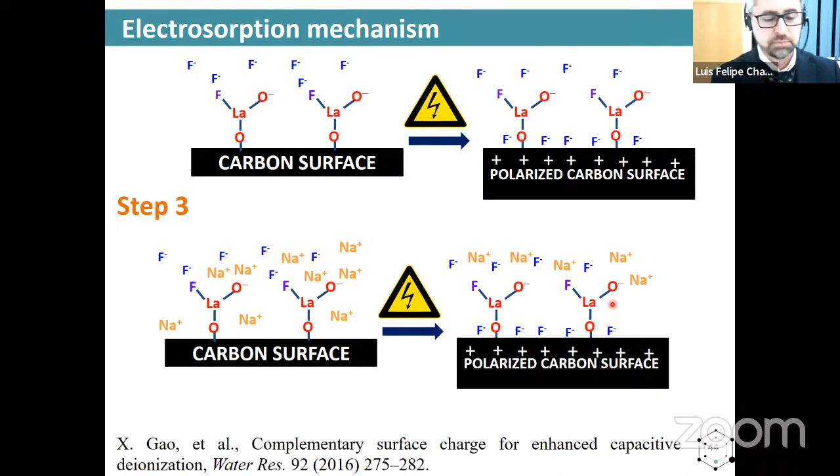Additionally, it is known that lanthanum can expand its coordination sphere. I mean, lanthanum can accept more than 2 fluorides, and this is very well described in the literature. So, as a conclusion, if we increase the amount of lanthanum, we can provoke that the narrow pores are not only obstructed physically, but also electrically, due to the exposed antagonistic charges from the protonation. So we have to take care how much lanthanum we use and how it can affect the textural properties.

So the first hypothesis that we proposed, that the lanthanum can provide capacitive properties, was not true; these hydroxyls cannot contribute with capacitive properties. So it's probably better to have a lanthanum oxide, for example. But we don't know. It's another idea.

We also explored the reversibility of the process. This is important, of course, for the regeneration of the material. You can see that if we invert the polarization, we provoke the desorption of the fluoride, reaching almost 50% of fluoride desorption in the case of the modified electrodes. So in conclusion, the electroadsorption of fluoride was favorable with a very small amount of lanthanum.